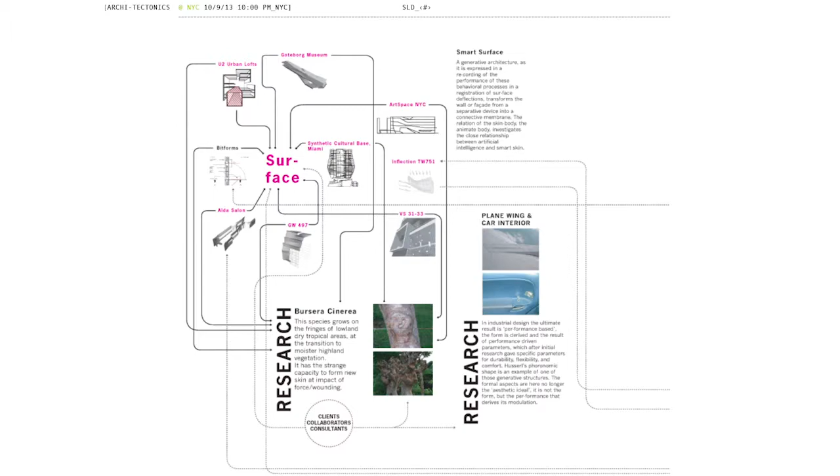Quite a lot of our projects think about that, and that goes back to what I figured out in the beginning: organic systems and industrial design share this, where fragmentation is actually about optimization, that they embed intelligence, and very often it's bottom-up in the sense that it has feedback on different levels, system to system, people to system, or in architecture, city to system.

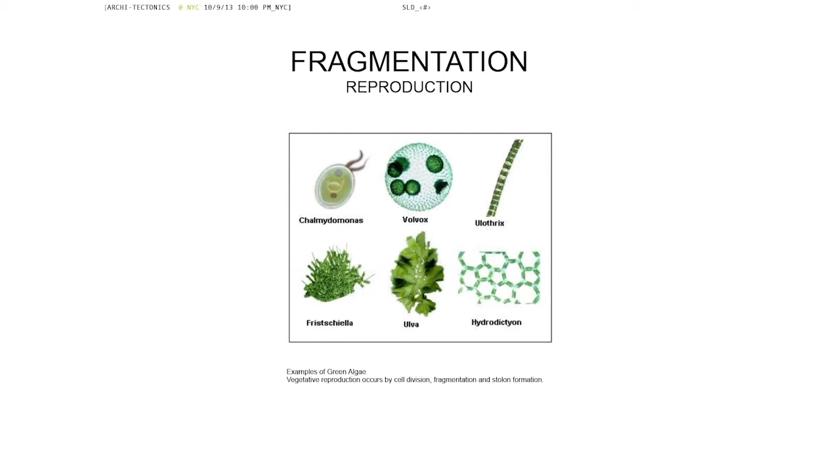Fragmentation, as we all know, especially in nature, is very much about not only cell splitting, but reproduction and becoming more and more intelligent. So it's not just fragmentation in the sense that leaves form themselves to catch more light or produce more, but also the cell splitting makes the system grow.

We all know the idea of the internet, where our messages split up and fragment in order to go faster and more optimized through the system, to end up, most of the time, at the end of the world very, very fast. And bottom-up systems are of course very interesting because they play with the top-down, bottom-up, and so it always means the big fish eats the small fish, but the big fish is being eaten as well.

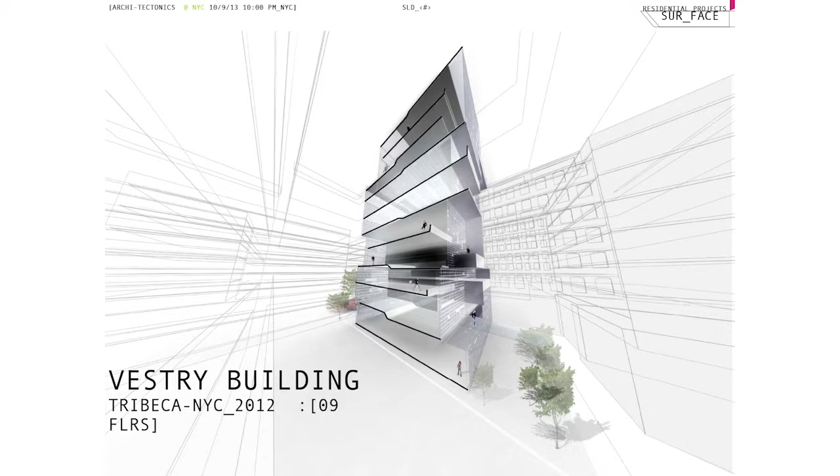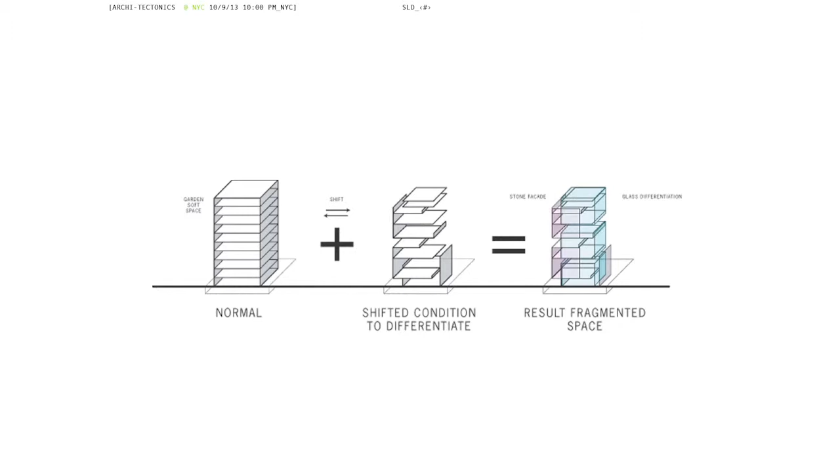Another project still in this idea of surface and super flatness which can then fragment is the Vestry Building we currently just finished in Tribeca, where we not only optimized the facade system, but also started to think about, if a building is normally just a building with facades all around, how can we optimize the north street facade versus the south garden facade? Very different conditions, definitely worth optimizing in many ways.

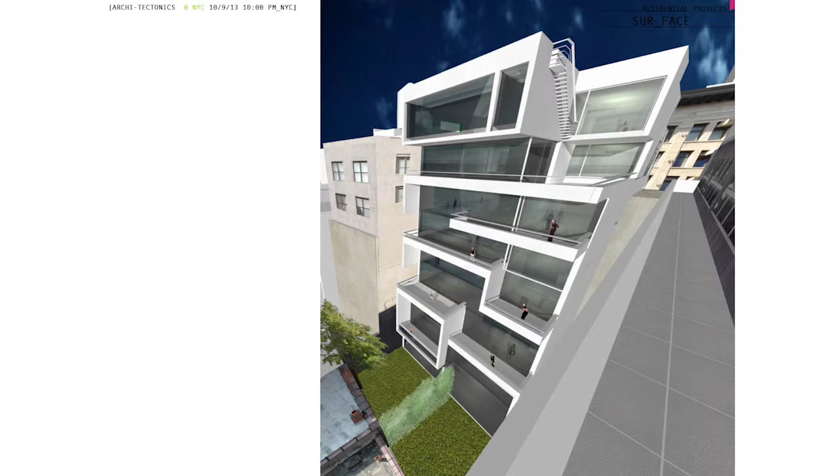But it gave us a great opportunity to do that not only in facade systems - it was super accentuated and very deep on the south facade, and a very flat, pixelated north facade - but also in the floor slabs. What we did is we compressed the floor slabs extremely towards the north and the street, and opened them up and cut them shorter, creating double spaces towards the south.

Also, again, I guess I hate hallways. I've never made a real hallway except to go to the lobby or the elevator. But the idea that you compress space and open up space kind of eliminates the need for walls and separation.

The other thing that's very interesting, in New York, we do all kinds of things with cars. Some people put them in elevators. I put them underground with an elevator, so we have parking underground here. We also have all the mechanical systems in the back of the garden, so you don't have anything on the penthouse. And every floor essentially is completely different.

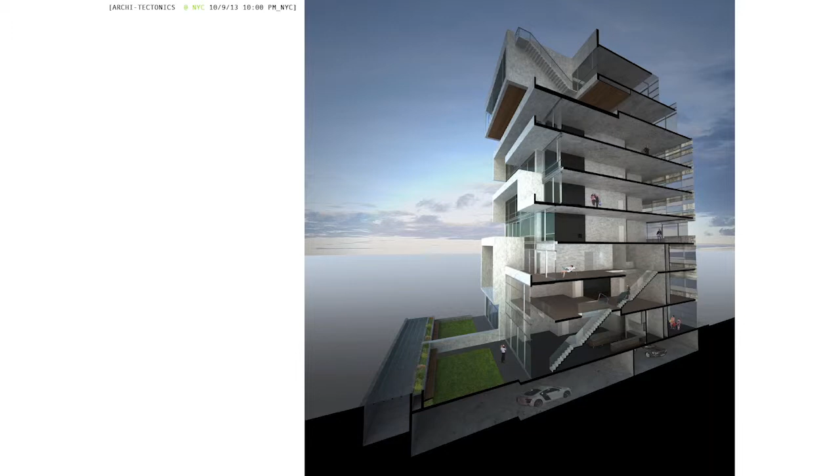Really interesting also about working as we do now in digital systems is that there's no need for the kind of repetition and prefabrication we used to develop in the 50s, which were super efficient, but we can achieve that same efficiency and prefabrication without having to repeat the same unit over and over. So this building essentially has only 7 units, and every unit is different.

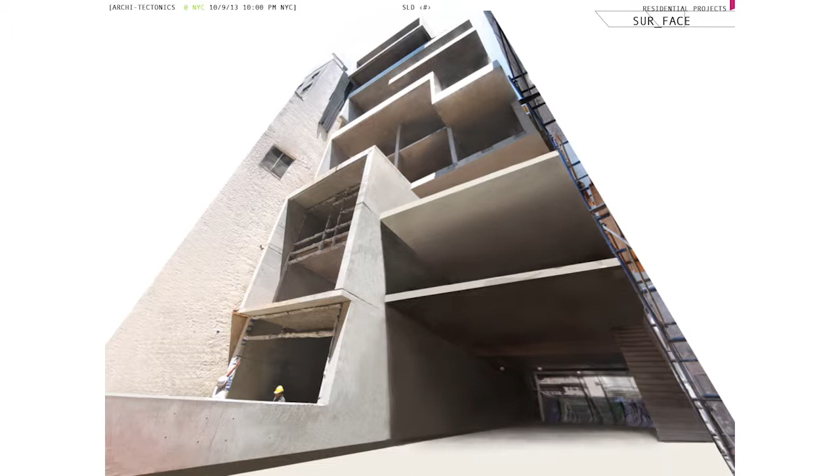There's two triplexes, one with a double height space and a ground floor, one with a double height space and a balcony, and then every floor is a full floor, different, and a penthouse which more or less looks like a separate house on top of another house. So we actually call this a set of stacked villas, and the idea being that if you buy your dwelling, why would you have to have the same as anyone else?

What's also really nice is if you get this one moment where you just have the concrete. I find this extremely hard to build concrete in New York, and it seems like an impossible thing to do, and it kind of is. But the beauty is that it really takes structure to another level. You can have completely different spatial effects, and your diagram actually looks like your concrete structure, which is always an exciting moment.

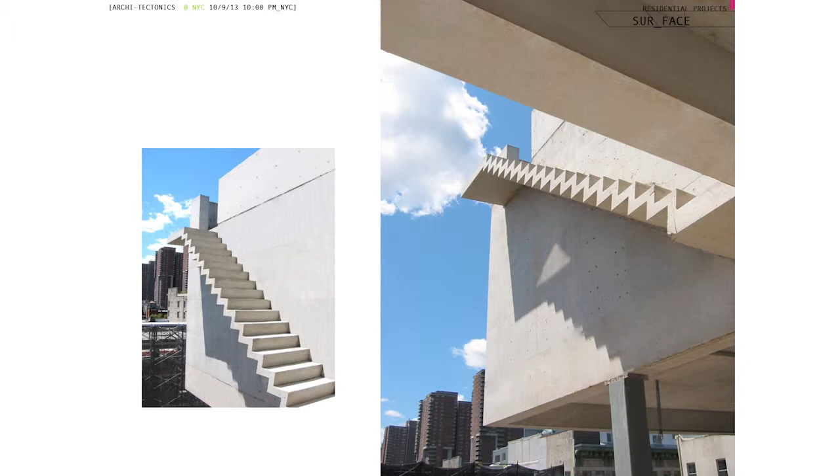But then the other thing is that everything cantilevers, so not only the huge cantilevers of the balconies and sunrooms, but also stairs. So all our stairs kind of come off the building. We call this one Stairway to Heaven because it has this very poetic moment. And that is in the penthouse, so there's this idea of in and out weaving from the gym up to the roof, and also from the terraces around the living space.

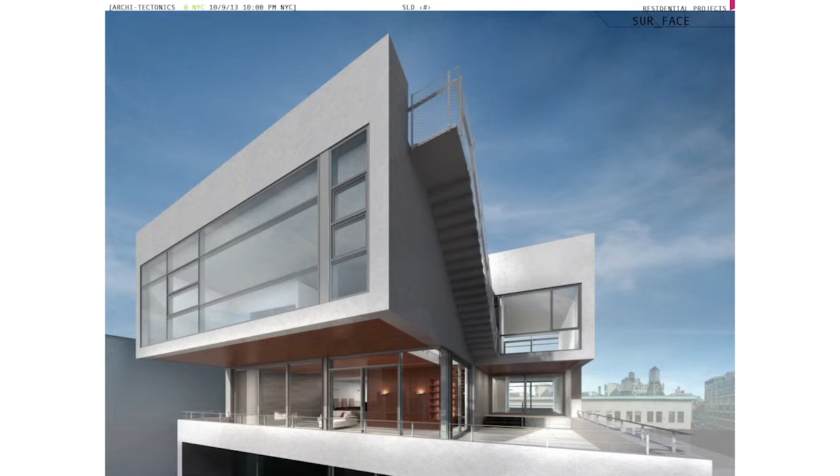So the extensions not only give this connection, but also start to carry material intelligence through. So different cladding, as you see here, wood starts to inform the inside.

And then, of course, what we're all jealous of as architects - we build a lot of stuff we never see, some architects do, but I don't see myself having that very quickly. This roof is definitely a very nice roof. And as we just finished it, I have photos which are sort of finished, but I haven't officially photographed it yet, though it's kind of fun to see the Freedom Tower grow in the background as we finish the building.

Over the last few months. And then, of course, as you see it's finished, it's been kind of interesting.

I think the other benefit of the parametric is not just that we can come up with these forms and inform the people who make these forms very easily and quickly, facilitating shop drawings, but also that we can order all these materials easily all over Europe.

So what I got probably addicted to in Greenwich, I did the same thing here. This curtain wall facade is made from a German system, Schüco. You'll see in a minute, the inside is extremely thin, gorgeous titanium finish. Huge glass expanses I cannot buy here, so I ship them from Italy, ridiculously enough, to actually have this kind of huge sheet of glass.

And then the idea of folding these spaces into each other so that you get these kind of very special moments where you really feel like you are framing your own house in this city, where you constantly have to be reminded that there are other people present. But in this way of folding, you actually maybe don't.

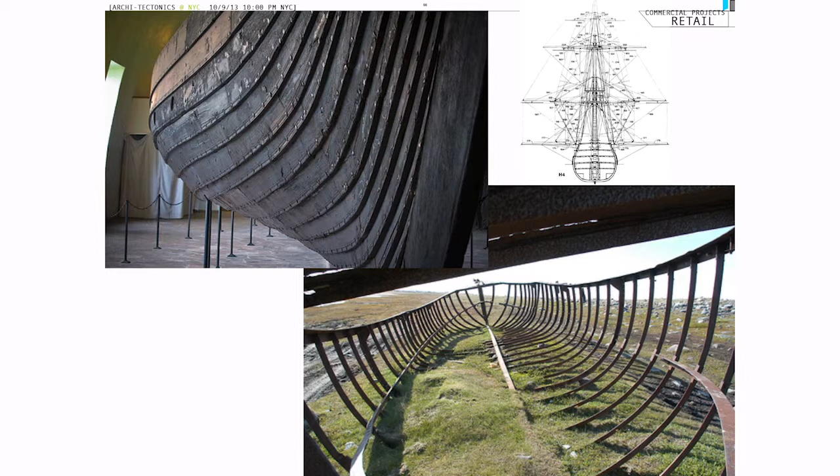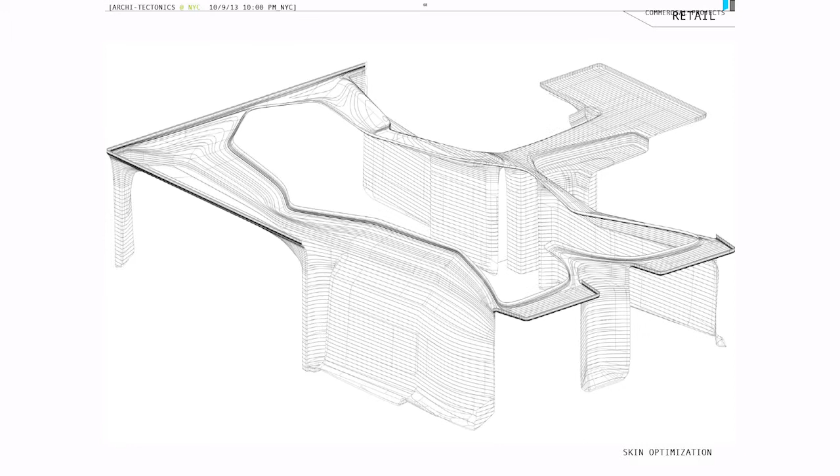So looking at the harbor culture, we thought it'd be interesting when we did the shop to start to think of whatever contained the collection as a very organic unit, which could always adapt more or less to the space. It's not unlike how the lining of your coat adapts to your coat. So the coat was the building, and this was the lining we imprinted as the fit space, or the most optimized space. We asked the client to buy an old wooden house and recycle the wood, so we would basically embed this digital liner with a very local recycled material.

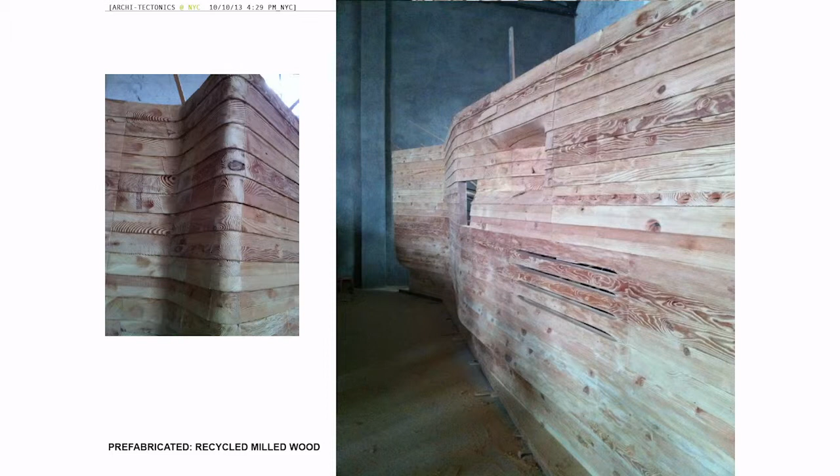And then we basically gave him this 3D model. It was CNC'd, computer CNC'd out of the space. And quite funny, it has very digital, electronic and kind of mechanical systems imprinted in it as well. So all the air conditioning vents, the sound speakers, everything was actually recorded in this very rough wood, as well as niches and folds and all the other things.

So it was quite a, it's one of those things you can do in China, which is fascinating. It's a big machine running it for days on end.

And then also the bottom panels where we had the smaller parts of the collection, so the scarves, the jewelry, the bags, were set on tables which were custom poured and set in small pockets which were CNC'd to have light coming from above, beyond, or below, so that there was a kind of unpredictability to the light sources, but also a play where you put the tables was completely random, and that you could inform these surfaces with information or just leave them quite neutral.

The really beautiful thing was that they still have GRFC. It's something we developed here, I think, in the US in the 50s. It's kind of a fiber-reinforced concrete which you pour in molds. And so essentially the computer information was made into molds and the molds were prefabricated. And then they came to site with these units. And because it was fiber-reinforced concrete, they were able to finish them completely seamlessly.

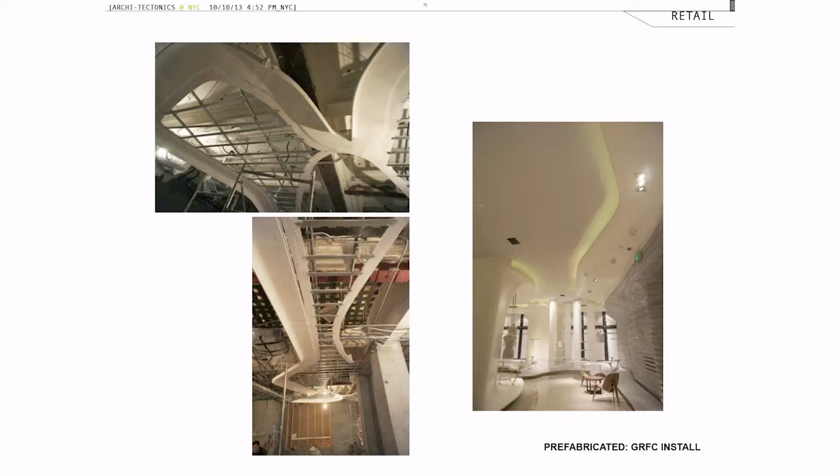So you see from these kind of slivers which came to the ceiling, it in the end got kind of almost elastically or plastic in its environment, and then every seam was accentuated with small LED strips so that they really separated, but also the architecture itself became the light rather than adding light fixtures. And the only light fixtures we added were really the ones I showed you earlier in the platform, but also the ones which were then lighting the collection.

So in the end, it looks like that.

We also developed an idea. I always hate these plastic people who have to show your clothes, the ones with the spastic arms. So we decided to create the busts, basically the tops of the body. These are small metal frames with a beautiful canvas wrapped around it, kind of the old neck, how it used to be done by people who used to make suits by hand with copper wires. And then we have some which were actually sculpted in recycled wood as well, but they hadn't arrived here yet.

So it was quite an interesting endeavor to start to make the body before you actually make the fashion. And then here you start to see that skin, how it holds the collection, and how basically everything you sell is in that kind of wood liner, whereas the highlights of the fashion shows are actually suspended in the middle on these columns, which also get embedded seats and lighting, as I said before. So you get these moments where you can sit, where you can look at these small things and be wrapped in these kind of fluid spaces.

Sometimes the walls are padded to just kind of get the acoustics under control and make sure that people can gossip and not be heard somewhere. This was right next to the fitting room. And also you can see the wood. We, again, didn't finish it. I think wood really needs to breathe. So here we just rubbed it with silver powder and oil to just leave it completely unfinished.

And the fitting rooms have basically a mirror framed by mirror, as you can see here with lighting just by sandblasting the mirror surface off, and a pivot mirror behind you so you can actually see yourself in a more clear way.

And this door was quite funny. The client called me at some point and said, 'You forgot something?' And I was like, 'Sure, I forgot something. I mean, we always forget something.' But in this case, it was the exit door. And I said, 'Well, we have recycled the whole surface. Why don't you find an old door and just recycle the door? And we'll treat it with fire retardant spray.'

And he took that very seriously and went shopping and found a 600-year-old door, which was pink and blue. I was like, 'Yeah, that's a beautiful door, but it's pink and blue.' And he said, yeah, don't worry, it's bronze under it and wood, so we'll clean it up. And so we got this amazing door, but still the wrong door handle here. I still have to rephotograph the door. But that's our fire door, so it's probably the most beautiful fire door and the most illegal fire door, I would think, but it's China.

So this is the space looking back at it, and it was really good. I think we realized we moved, as everyone did, from small projects to big projects, and then I went back to small projects, because not only do big projects take a long time, but you realize the small projects are where you actually do your inventions and try things out. Some of that we tried out in this project with the mayor of Holon, another part of Tel Aviv. The mayor wanted to make a municipal hall completely different from the very top-down, monumental municipal halls which are historically there.

The idea is that a municipal hall is actually a space where they build extra space they can rent out and grow into, but also they wanted it to be completely accessible and transparent. So it was not only that, it was also housing, a music hall, and shopping - complete integration into the city. Many cities have this problem: huge highways cut through the city, and then we get asked to fix that later. So we have a very large pedestrian unit with bicycle paths and pedestrian paths going over the highway, which is almost the most important part of the project - to stitch the whole thing back together.

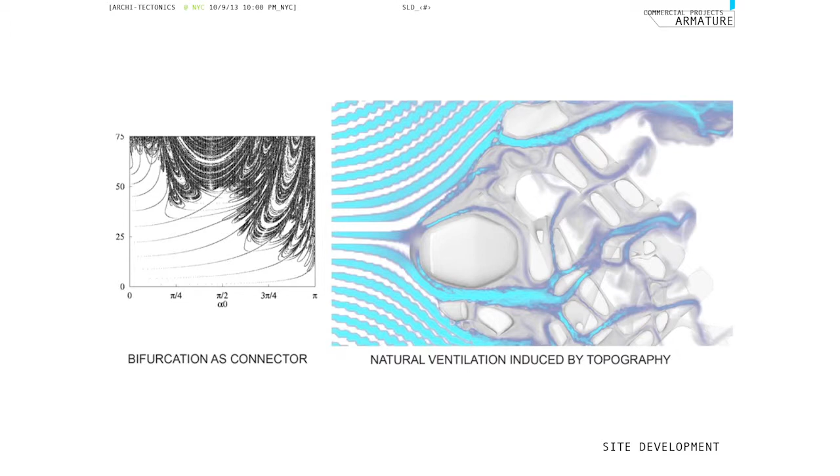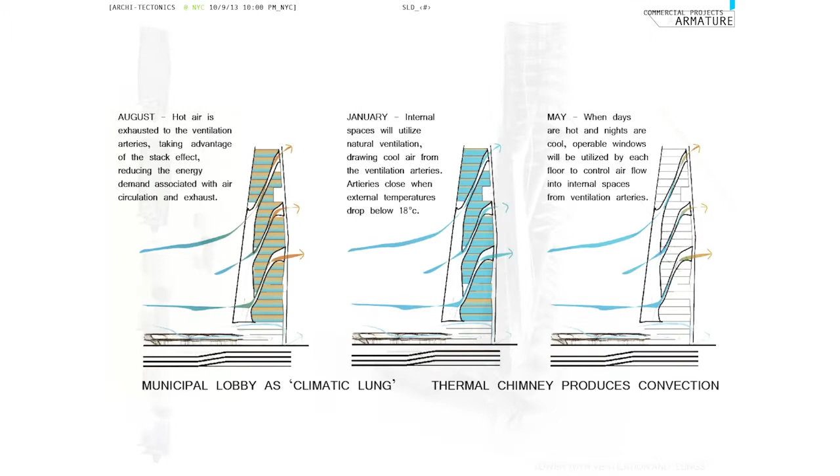One thing we realized is that not only is Tel Aviv extremely hot, it also has a prevalent wind direction, and we decided to use that wind for a more sustainable idea of the tower. We try to use this kind of chimney effect to cool the tower by night, then have a cool surface by day, and make lungs into the building which contain that air as long as we could. That feature becomes the public space of the building as well as the breathing of the building, and it segments the building into parts which are municipal and rentable - like organs within, liver, heart, and kidneys within one skin, clearly distinguishable.

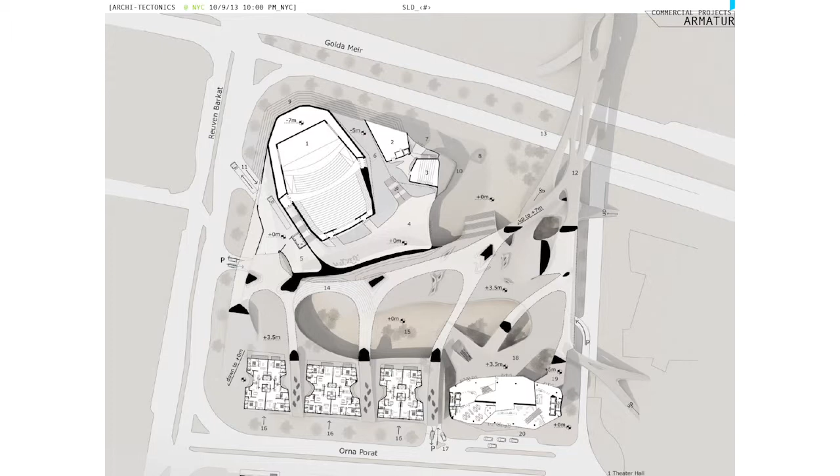The municipal hall and the bridge come first, and we space this over time. Once the whole thing is built, it's a very integrated system which optimizes the connection to the buildings as a system, and gives a kind of secondary skin, a very perforated skin, to create an environment by day which is really accessible.

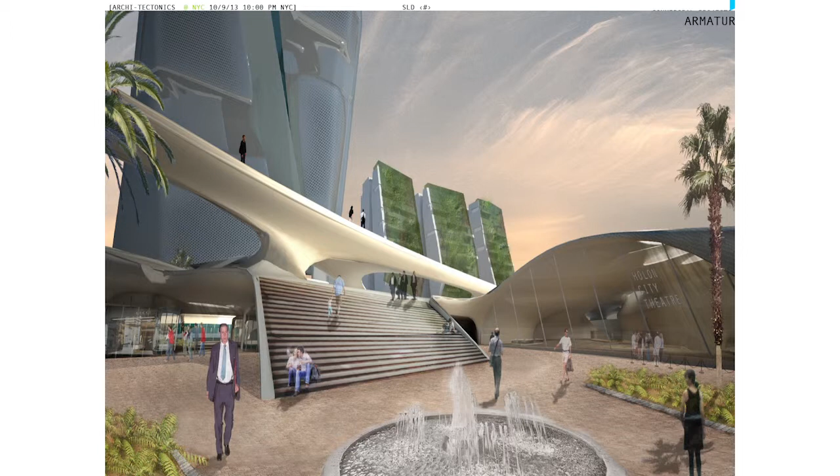The people in Tel Aviv love to use their sandstone - it's white, very beautiful, and very hot in the summer. So it was important to create this secondary skin to make this environment doable, with natural shading and misting under these cantilevered surfaces, an outdoor theater, and a fountain to help create it. This is the music hall I'll show in a bit, but this is how you enter from that bridge to the municipal hall.

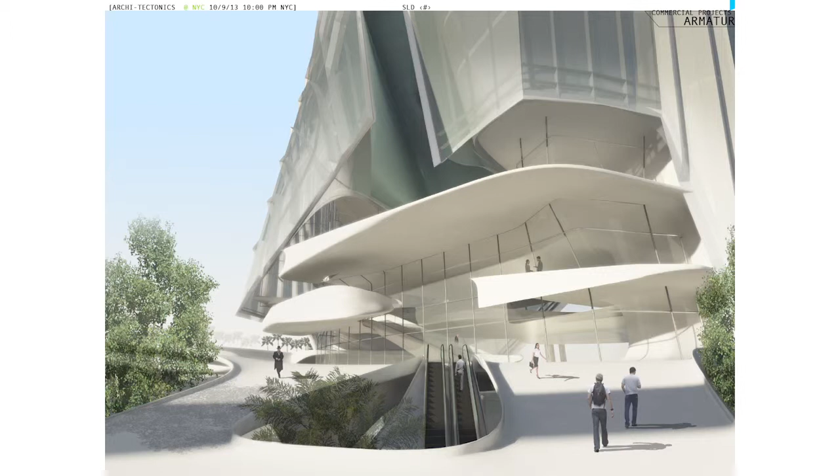The bottom layers are kept very open, and the lower level of shopping comes up here, but the bridge itself has quite a bit of perforation. The idea is that it's not a gigantic surface coming over different systems, but there's constant penetration of systems up and down, as you can see here again. So the integration of different levels started to be really important here.

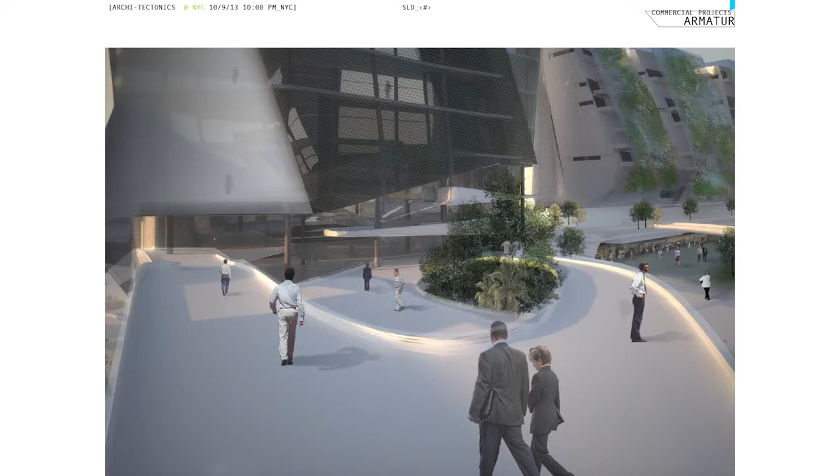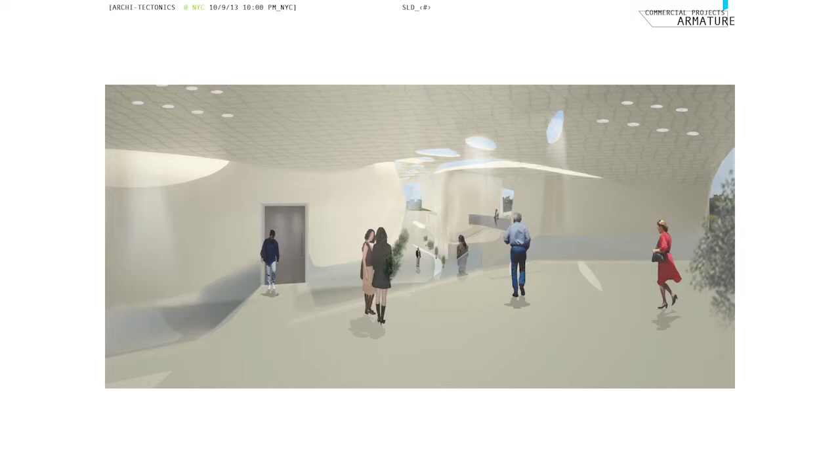The natural ventilation didn't only happen in the tower but also in the music hall, where fins are made into the ceiling, opening it up and allowing natural daylight, but also doubling the scales of the building so you get natural ventilation. The liner of the music hall is embedded within that system.

What was quite interesting to us is that the natural common area of that whole music center combined both academic learning of music systems - there's an educational center here - as well as performance. So we made coffee shops and common spaces to be shared by everyone.